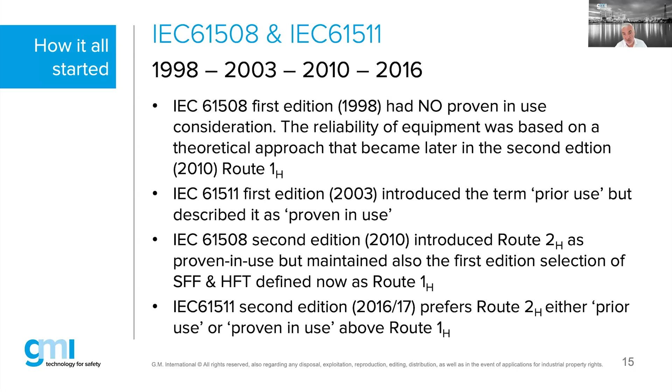If you don't have your own failure data from your own installation, the alternative is you can ask your vendors for, say, subsystem or product documentation. And that documentation is either based on Route 2H, which is called proven in use from the 61508, or it is based on the theoretical FMEA estimate of failure behavior of that product, which is then called the Route 1H. But again, I made a summary that you can visually see this into a table.

Going into a little bit more details on definitions. So as I mentioned, proven in use in the initial edition 1, 1998, did not exist in the 61508. They only introduced it in the edition 2, 2010, which is a definition, and I'm referring here to part 4, which is all the definitions from the 61508. And if you read the definition itself from proven in use, that means you will have to prove something. It's done with a demonstration based on analysis of operational experience for a specific configuration of an element, that the likelihood of dangerous systematic faults is low enough so that every safety function that used the element achieved its required safety integrity level. Well, you can keep on reading that.

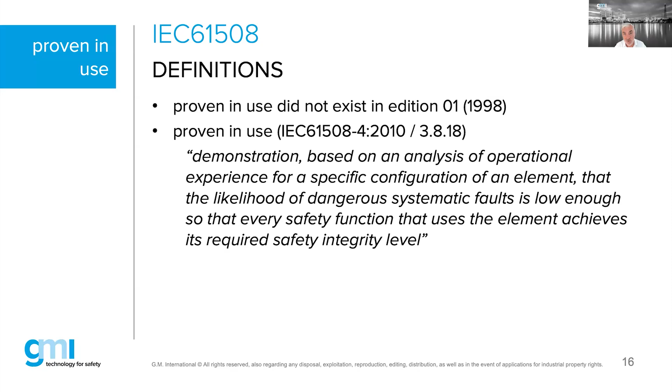That's quite subjective, but at least they are trying to say you need to prove, you need to demonstrate that the safety function of your safety device or component or subsystem will achieve safety even in case of some dangerous systematic faults. Now, of course, you can ask yourself the question, what is now a systematic fault versus a dangerous random hardware fault on my subsystem? So there are all kinds of definitions. The more you start to go into details, the more the confusion will rise among the engineers.

The definition of the 61511, which is the prior use of the edition 1 2003, the reference was given as proven in use, as already mentioned, and they said when a documented assessment has shown that there is appropriate evidence based on the previous use of the same component, that component is suitable for use in a SIS or a safety instrumented system. So again, it's quite a wide definition, which is not so precisely detailed for most of the engineers as you would like. So there is still room for interpretation and room for subjectivity.

Edition 2, which was the 61511 2016/2017. If you go to the same reference, which is here the reference given from chapter 3, which is in part 1. And they said prior use is a documented assessment by a user. So you can read this as an end user because it needs to be the user of that device, that device is suitable for use in a SIS and can meet the required functional safety and safety integrity requirements. That means the necessary SIL requirements based on previous operating experience in similar operating environments.

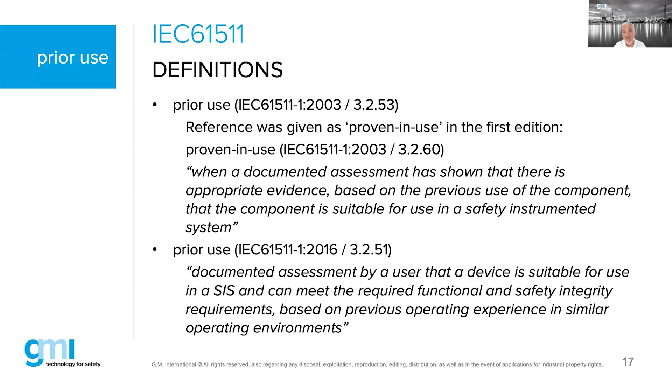So they are trying to be a little bit more precise, but still, as my British colleague would say, you can drive a bus through such type of definitions, which basically engineers will do. They will make their own interpretation of that. So we are certainly not out of the woods yet. There are lots of definitions given to us, but no one really can precisely tell you, based on their own interpretation, what exactly needs to be proven as proven in use or prior use.

When I go into the 61508 edition 2 for the manufacturers, the hardware safety integrity is strictly constrained, which is actually known as how many do you need in order to achieve a certain safety. We will abbreviate that with HFT, or hardware fault tolerance. There are two potential solutions by 61508 edition 2. The first solution is the old 1998, which is the edition 2 of the standard, and they go back to the edition 1, which is a 1998 Route 1H, based on hardware fault tolerance and safe failure fractions.

The concept is based on safe failure fraction, and we will see later a table. The higher the safe failure fraction, which is for type A and type B, which is table 2 and table 3 of the 61508 standard, they will give you a table, and you will see the higher the safe failure fraction, the lower the HFT for the higher SIL.

That is something that I will show you. And that is still based as we used to have it in edition 1 of the standard 61508. Route 2H, based on component reliability data from feedback from end users, increased confidence levels and hardware fault tolerance for specified safety integrity levels.

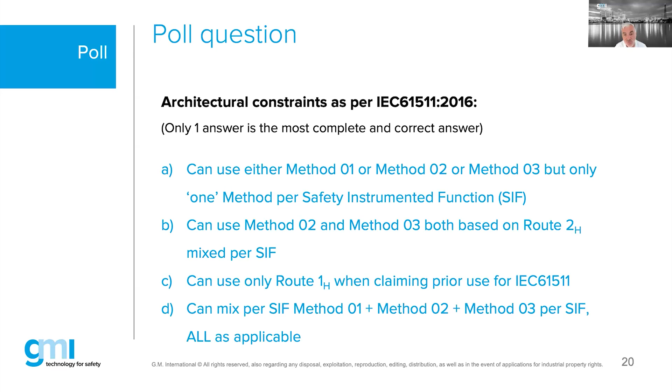And then the other answer was saying you can only use Route 1H when claiming prior use. Well, that's totally wrong. Whoever has selected that, that means there is some fundamental misunderstanding of the standard, because prior use has nothing, and I repeat, has nothing to do with Route 1H.

All right, let me continue. That's a summary table, which we were explaining in the previous slides. So focus here on the top on the HFT. That stands for hardware fault tolerance. Ask yourself the question as an engineer, how many dangerous failures can my safety loop tolerate and still achieve my safety function? If I'm telling you HFT 0, that means your system doesn't have to tolerate any dangerous failure.

And HFT 0, that is the one you see here on the right-hand column. In the bottom corner here, you see minimum required HFT. That's table 6 from the IEC 61511. And I already mentioned for SIL 1, any mode of operation, you can actually build this and comply to the standard with an equivalent of HFT equal to 0.

Whereas for a low demand, that is less than once per year, you can still do it with an HFT equal to 0, but if you go to high demand continuous mode or for a SIL 3, any mode, it's always required to have an HFT equal to 1.

The conditions before you are allowed to claim here Route 2H prior use evidence is quality feedback data. And again, I made some slides on that. End user feedback, that means it needs to be the end user's feedback, not from someone else, not from a commercial database. It needs to be your feedback if you are an end user listening to this webinar. And the standard will give you guidance on the report 4, which is coming from the 84 committee. In the meantime, we have a new date on this, and the NAMUR 130, but I have the correct dates on the coming slides.

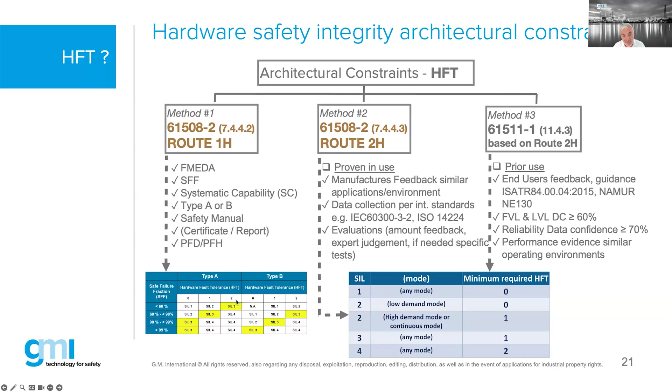And if you look in this table, for the HFT 0, 1, and 2, it is the amount of safe failure fraction. The higher the safe failure fraction, the higher the SIL with a lower HFT. The lower the safe failure fraction, the higher the HFT will be to achieve the same SIL. That is what you see here on this table. That's the minimum table, table 6. I will skip that, as I already have explained. Conditions are to collect data.

And I updated this slide. For those who listened to the previous webinar or the recorded session, it was still based before 2023, the release of this new updated NAMUR recommendation. For those who do not know what NAMUR means, it's an association mainly driven by the end users in the chemical and petrochemical industry. NAMUR has a whole list of recommendations and guidance that you can access. Of course, you need to pay a membership to access these documents. They are not free of charge.

But there was an updated revision in the NE 130 reference document, here July 2023. So it is the newest revision, one year old. The other one here is called Report 4. And as you have seen on the slide, it was still mentioning 2015. The correct reference should be 2020. So that's a typo. I should have updated that, but I clearly forgot. I updated to July 2023 and I forgot to type 2020. The picture is the front sheet of my document, because I'm also an ISA member, so I also have access to the documents.

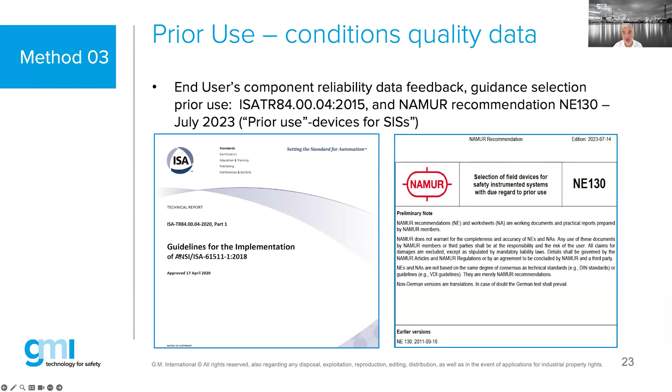Actually, I purchased that document, because if you are a member of ISA you can access the documents, but you cannot take screenshots or copy anything. So I had to buy this document to have full access under my license to understand what the report was asking. Here they give guidance for the implementation of the ISA 61511, and that was the reference I was giving you earlier, which was 2018 when they adopted it. And Report 4, the TR, standing for technical report, has been out since April 2020.

What is now the issue with prior use, or what are the items that you need to focus on? Reliability data that you need to claim or prove as evidence needs to have an upper bound statistical confidence limit of no less than 70%. The volume of operating experience, there was also a question on that, and I can already mention it here: there is no exact volume precisely defined. How many hours do you need to prove? So that's also a subjectivity of the standard that hopefully, in edition 3, will be more precisely defined.

You need to prove increased confidence levels with the same evidence and the same demonstration of such performance of the devices in similar operating environments and applications. Diagnostic coverage needs to be more than 60%. That's a giveaway, because there is no diagnostic coverage-based device today on the market with less than 60%. So it's always more than 60%. So I wouldn't worry too much about the fourth bullet over here.

Consideration of the manufacturer's quality management and configuration management system, that could be more formality and procedures. So again, that is not really the issue. The real issue will be the data quality, the 70% confidence, and of course, how many hours of operating experience do you need to prove?

Another topic that I mentioned here as a challenge for most end users is the evidence of adequate identification and specification of devices where there is some firmware included. My classical question on training classes, like last week I was doing another training class, mainly with end users, is: do you have records of all the firmware controlling your safety loops today? In other words, do you have a record of the firmware of your smart HART transmitters? And potentially the answer is 99% no, we don't have this.

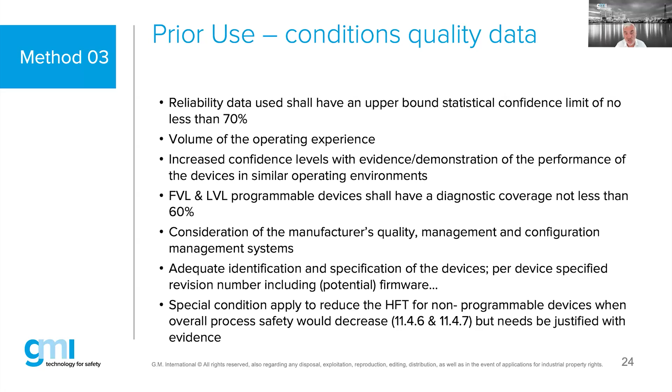So clearly SIL 3 is still a requirement defined in the standards, but the use of SIL 3 is starting to fade out. The use of SIL 1 is starting to win. SIL 2 is starting to lose the battle against SIL 1. And I know clients where even SIL 3 is forbidden. They tell their engineers, do your magic on numbers and make sure we have no SIL 3 needed as a requirement in our installation.

Proven in use is coming back in 61508. The manufacturers need to collect data. And the question is again, how do the manufacturers do that? Do they get the data back from their installations? Do they know exactly how it was configured? Do they know exactly how it has been proof tested? Do they know the conditions where the sensor or device has been installed? And if you believe they know all that, then yes, you could maybe start to believe proven in use from your manufacturers. I doubt it, because I'm always a devil.

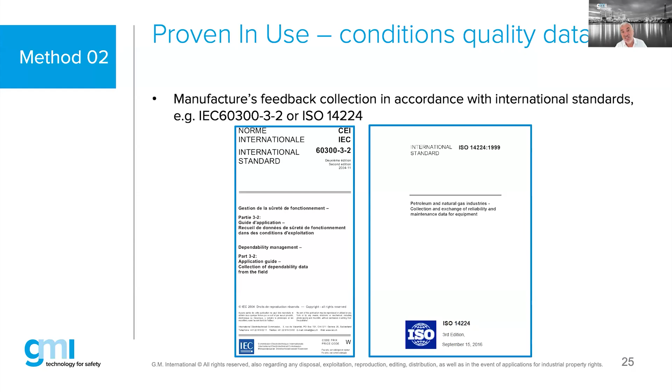If I'm having an inspection and I'm doing an assessment on a project and we have proven in use, I challenge the vendors to convince me with evidence how they came to the judgment that this device is suitable to be used for the situation and condition and application and environment that I'm actually making my inspection in.

Based on field feedback for elements in the use of similar application and environment, and there are 3 conditions, we need also to find evidence that the data has been collected in accordance with those 2 standards, and that's the most difficult condition to prove evidence. They need to prove evaluation on the amount of field feedback.

I give an example. I had a vendor, they sold thousands of solenoids and the return was like 4 or 5 solenoids. The question is, is that reflecting reality? We all know, most likely not. But if their amount of judgment is based on the 4 failures which they have received back, well, that is for me something that I struggle in my brain to accept. I'm saying, that's not really the reality.

It may be different. So exercise of expert judgment and, where needed, of course, they are undertaking specific tests. So they will start to do additional tests because the evidence being provided is not sufficient or is not adequate enough to make their judgment statement.

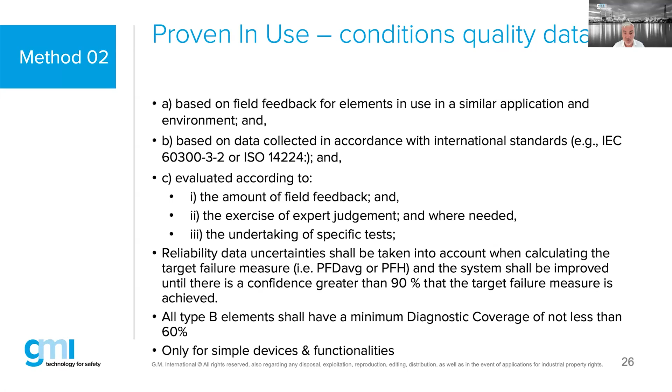Reliability data uncertainties, again, needs to be proven, but here we have 90% confidence factor, whereas 61511 had only 70% minimum. Diagnostic coverage must be more than 60%. Again, that's a giveaway and only for simple devices and for simple functionalities.

I'm just trying to launch the next poll. Yes, the second poll of the day. I'm just trying to find it, as per manufacturer. Is that the one? I think, yeah, launch this one.

So, okay. As per 61508 standard, which is edition 2, a manufacturer like GMI with a device and system certificate and test report. And now we can answer the following. A, can be based either on route 1H or route 2H, but only one route selection per device and/or system should be used on that certificate or on the test report. B, it can be based only on route 1H as per safe failure fraction hardware fault tolerance definition.

C, it can be based only on route 2H with failure feedback records. And D, it can be based on either route 1H or route 2H individually or mixed. So you have 4 potential answers here. So when a manufacturer is giving evidence on a piece of paper called certificate that the assessment is based on, what option would they be allowed to choose? Option A, B, C, or D here on this poll question.

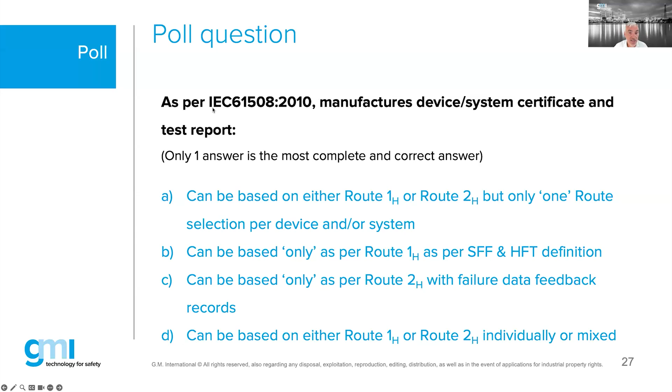Answer B, can be based only on Route 1H, as already mentioned. That would be great, but that's of course not always correct, because Route 1H is no longer the only option available. The vendors and the manufacturers will likely mix that. That's also why it can only be based on Route 2H is also not correct, because we mix them. So the only correct answer was indeed answer D, can be based on either Route 1H or Route 2H individually or mixed. Okay, I stop sharing that and I will click on the next page.

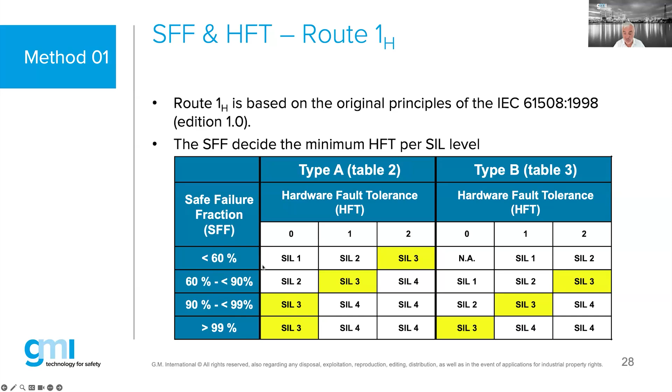That means, coming back to the safety relay from GMI for SIL3, that is the reason they have a safe failure fraction just above 90%. If I take one of the certificates from GMI, I can show you: if it is a SIL3 device, the safe failure fraction will sit above 90% and below 99%. And possibly Massimo will acknowledge this because he will recognize it in the documentation of the devices. They will have type A, with a safe failure fraction of just more than 90%. And that's why GMI can, according to the standard, prove that this is based on the 61508 complying to SIL3. It is suitable to be used in a SIL3 domain.

Safe failure fraction is one. Second will be diagnostic coverage, if any, because there is some diagnostic coverage mainly on HART and smart transmitters, and on safety PLC microprocessor boards. There will be some diagnostic coverage on that. But for instance on a solenoid, on an actuator, on a normal mechanical valve, there is no diagnostic coverage. But there may potentially be some safe failure fraction.

That means the FMEA or the FMEDA that has been done on that type of device may come to an estimate of how many failures in time, and the quantification of safe failure fraction on such a device may lead to a certain percentage of safe failure fraction. What Massimo was mentioning earlier in the introduction was that they also have a systematic capability expression on certificates. That is the one that is shown over here.

And I can give you a small hint. The systematic capability number will be suitable up to the same level of SIL. In other words, if you have an SC2 on a device, the maximum SIL that you will be able to achieve, to keep it simple, will be SIL2. That means if you want to build a SIL3 loop, you need to find devices where SC3 is defined on that certificate. The safety manual per subsystem or device is mandatory. That means a certificate is not mandatory, but a safety manual is mandatory.

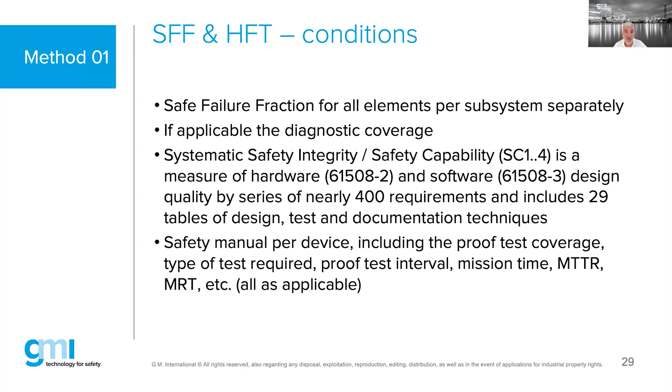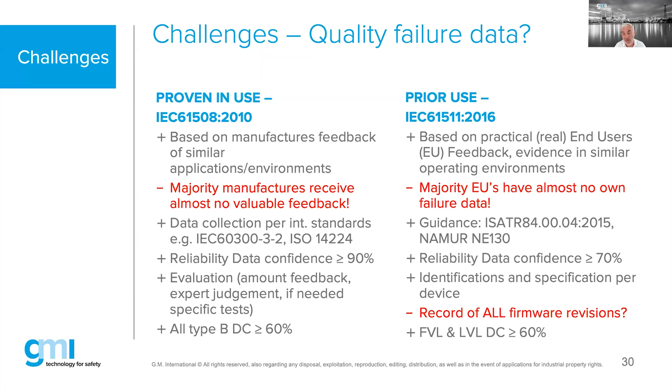On the right-hand side, the majority of the end users, when they want to claim prior use, well, first of all, start to collect your own failure data. And how good is the quality of your failure data? How do you prove your confidence levels, etc.? And the other challenge, as already mentioned, the majority of our end users never thought about what firmware reference number today is actually controlling their safety functions. Not for the safety PLCs, that's not the target here. It's mainly for vendors like smart and HART transmitters.

Right, coming to an end, trying to summarize and going into the Q&A. I saw there is another question coming in, but I will hold this for a moment. I first will summarize our webinar.

Of course, the question is, where do we start? How do we collect? Well, the IEC standard, unfortunately, will not give you very good guidance, but I prepared in the Q&A some guidance from NAMUR 130 that I would recommend you read, or read technical report 4 from the ISA, and hopefully with those two documents you will have some ideas how to collect, what to collect, how to prove it, etc.

Redefine your proof test coverage. Because how many of the end users know exactly what proof test coverage means and how do you prove that? And I give an example. I had an end user last week, mainly from a refinery, and the refinery had a turnaround of 5 years, which is one of the standard turnaround periods. That means in 5 years' time, they will go to a shutdown for 2 months. And in these 2 months, they have to solve 1 million problems.

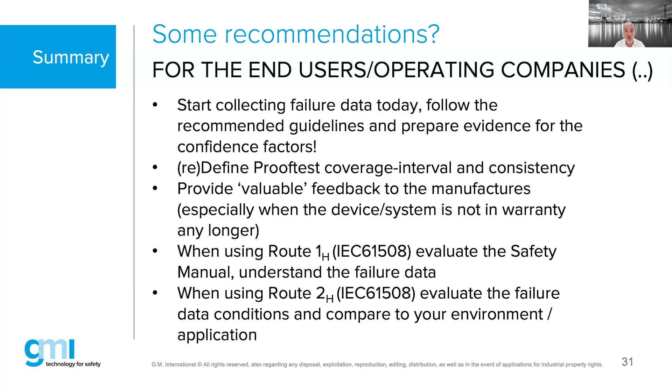And then when using Route 2H or Route 1H, evaluate, be critical, become a safety engineer. Do not believe what you read. Ask to prove. Because when I see a document, when I see a certificate, I am critical in my judgment, and I will ask them questions. Why does this statement on this paper mention this? What is the reason for that? How do you come to that conclusion? How do you come to that percentage? How do you come to that definition? That is something that I like to be critical on, my judgment, on my quality of documentation.

All right, let me quickly swap and I go in. But before we skip to another presentation, we have a question from our attendee. Okay, good. I will take it in a minute. Let me open this file over here. So we have predefined questions already coming in from people, but there is a question here coming in.

The concept of prior use relies on historical data over time. On the other hand, firmware updates have been upgraded more often. Is there a set timeline for how long a device shall be in use without change before being qualified for prior use? Okay, I'll try to read this again and understand. So I think the question is related to firmware updates on devices, and can we then still claim prior use even when we have a firmware update on a device? The answer is, in my opinion, no. You cannot maintain your prior use statement on a device when the firmware is different.

As I told you, if I'm updating a firmware in a device, that device can start to behave differently. On the other hand, even when the firmware has not changed, a simple example: the maintenance engineer needs to replace a smart or HART transmitter. How many settings do you have today on a modern smart and HART transmitter? The answer is too many. Hundreds of settings. When you replace a broken instrument with the same vendor, the same hardware revision, potentially the same firmware revision, will you make sure that all the settings are the same?

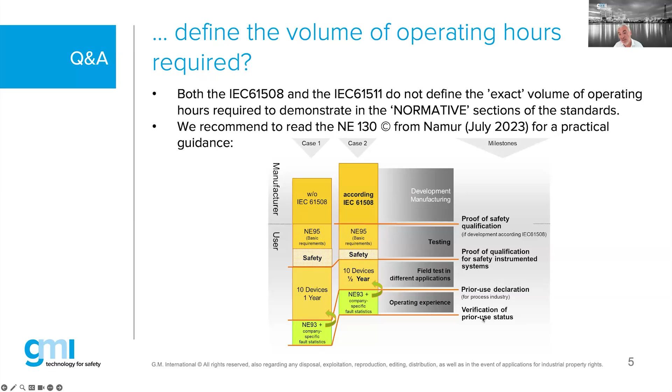That's one approach. If you go to the technical report 4 from ISA 84, they will give you a different approach. And last but not least, the last question: can you declare, for example, that the SIF meets criteria for SIL 2 if the route 2H prior use was selected for some devices within that safety function? Well, if I read the question now, I understand it differently than when I prepared the answer.

For instance, if you have a loop with 10 devices and 5 of them are claimed on prior use, you cannot say the rest of the loop will be based on prior use. It's for every single subsystem individually. That means still go back to the practical recommendation and guidance of those two documents which we referred to before.